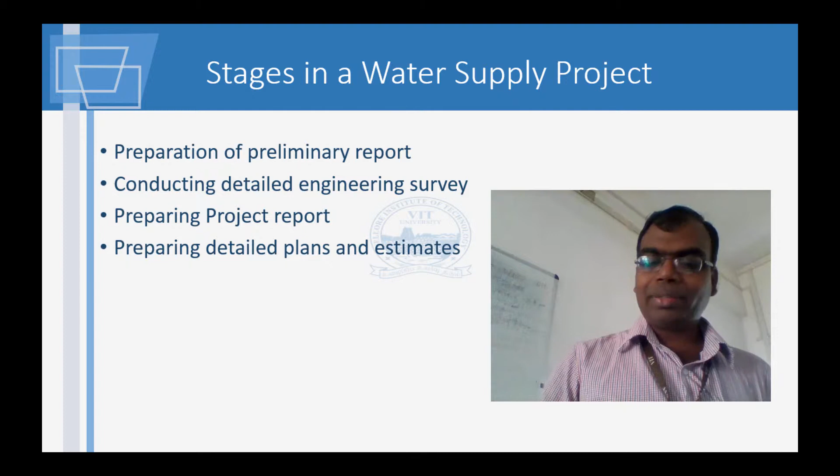Then you have to, of course, prepare the project report. Then there are detailed plans and estimates. Costing is very important, and in most cases there is cost overrun. I don't know in India how many projects have actually stayed within the scheduled budget and made a profit. All these things contribute to cost overrun.

For some reason or other, like for example, water hammer is a classic example. It is there, it's going, it broke.

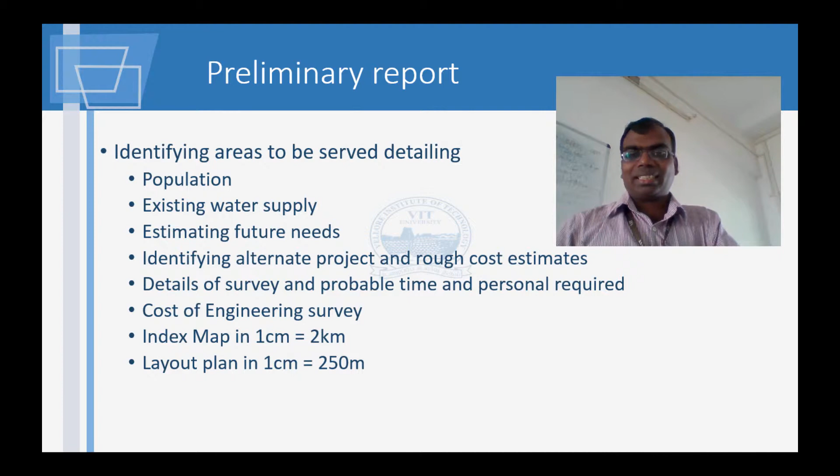Now this preliminary report, these are all points taken from that audit book. I'm not going to read each of these, I'm just putting it on the slideshow. Please go through what the government is actually telling us. So this is something about the engineering survey.

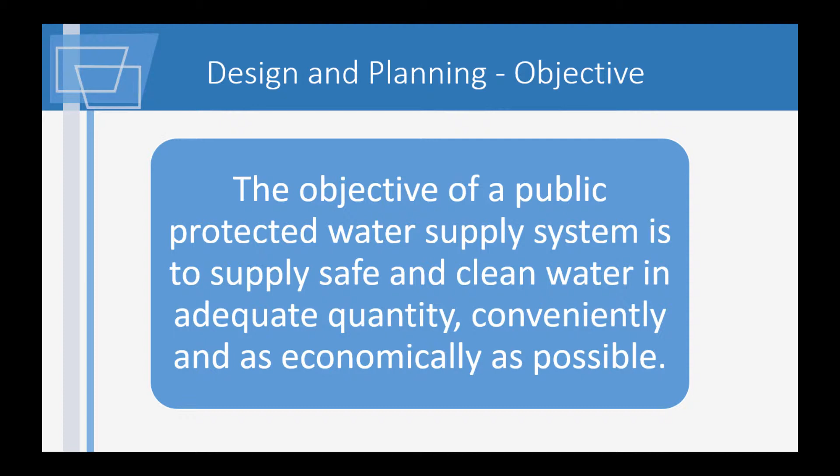So yeah, this is just the dates you need to know. I don't believe in asking people to mug up dates because they can just look it up. So just have an idea of this.

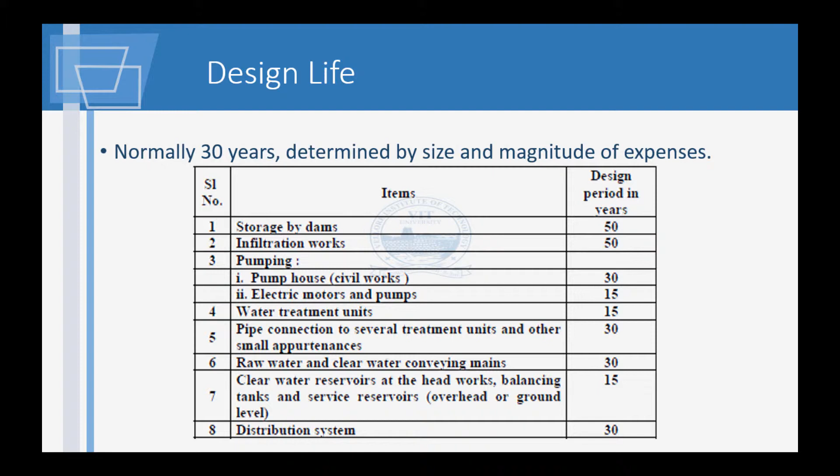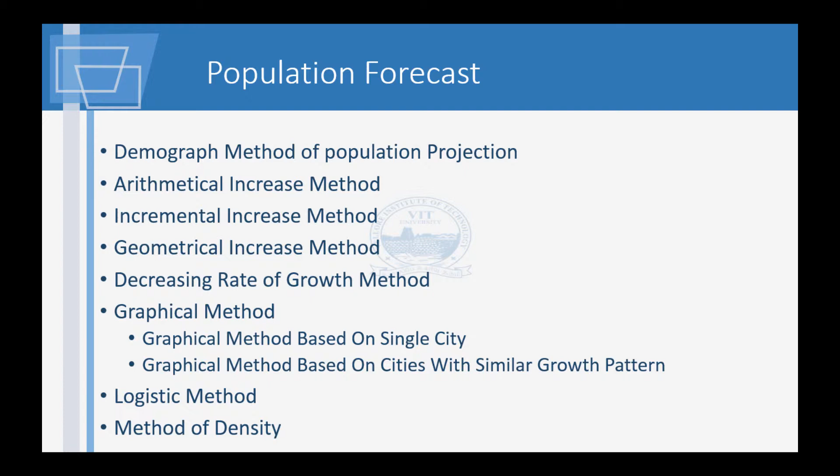Now this is the other important thing I would like you to go through: the population forecast techniques. If you have a look at your book, I don't think it will be there. Please have a look at your book. Is this method of population forecasting available, any of these? If it is available, I will not tell the story. Otherwise, I'll tell the story, and then you have to look at Santosh Kumar Garg. That book I know has it, and also this manual has it because I've taken it from the manual.

I'll suggest you go through the index, the appendix, the subject index. Apparently, it doesn't look like it's there. Okay, let's not worry about it.

I'll just run through this. So the first thing is the demograph method of population projection. What is this demograph method? They know that in this area, the population is not going to increase or decrease too much. Certain areas will be age old; there will be births, there will be deaths, and based on that only the population is going to be there. It's not going to increase too drastically. You can see many of the remote villages, sizes don't change.

For instance, my roots belong to a village called Minyanapuram, deep in the south. Even now, almost the houses are just the same, same thatch house. In fact, my grandma who just passed away, we go and visit her house, and it's almost the same, that's what my father says. I usually go every 5 or 10 years, and when I go there, there's not much change. Roads are still the same, everything looks the same, no change. So for that village, for almost 100 years plus, the change has not been there. So are you going to expect a sudden rapid change or development? Probably not. So this method will be applicable for such a case.

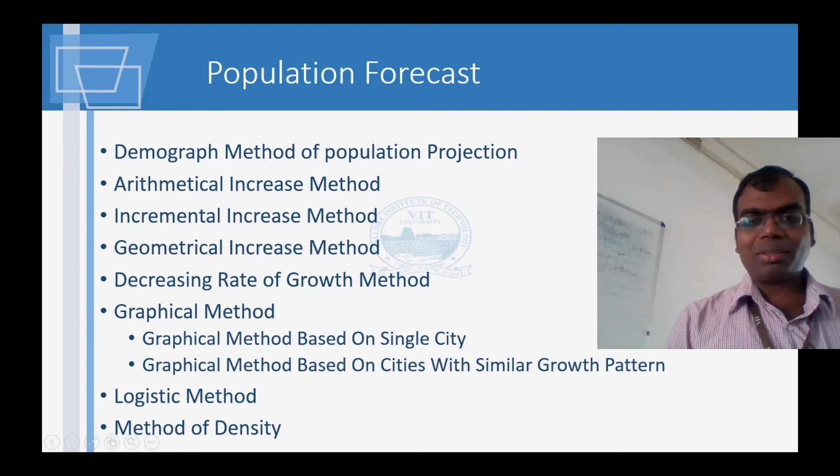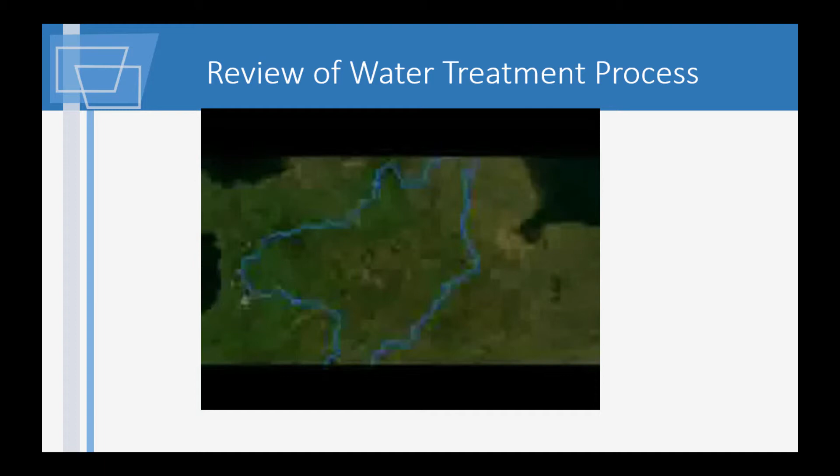I have another short video I'm going to show. This is another interesting video. I'm just putting it for review. You can try to mentally visualize the differences and similarities between the two systems. Again, it's going to be the same thing: some filtration process, some flocculation process. This is a very basic overview of the water treatment process.

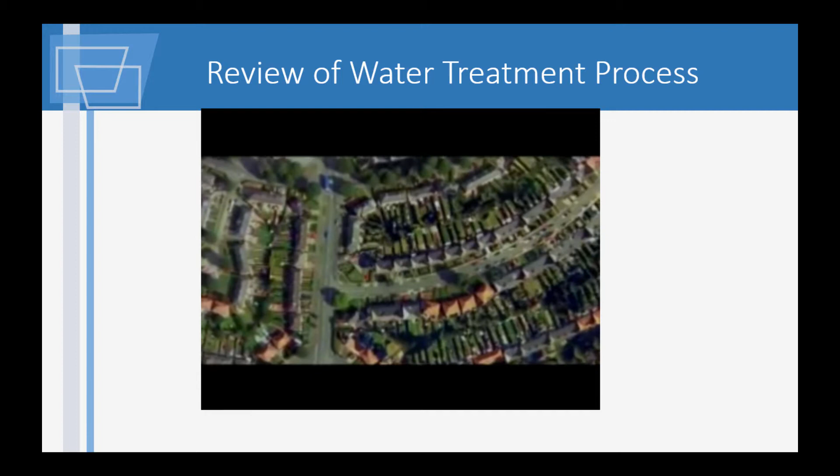Customers always need water, but rainfall is seasonal and increasingly unpredictable. So we often use storage reservoirs to make sure there's always a supply for treatment.

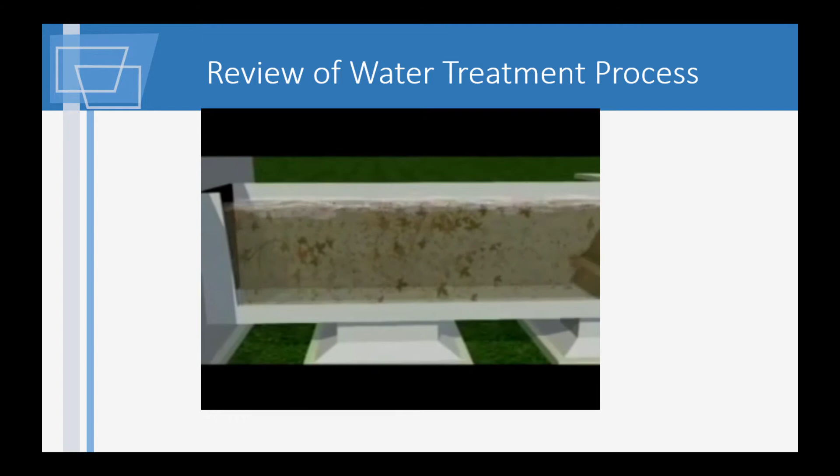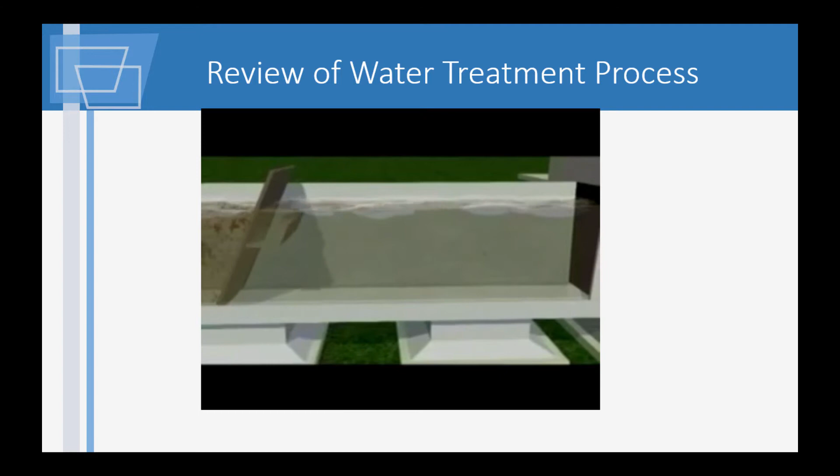By passing water through mesh screens, we remove sticks, water weeds and other large foreign objects. The air takes some odours and gas from the water and allows some dissolved metal salts to separate to be filtered out. We add air by cascading the water down a tower, spraying it into the air, or bubbling air through it. At this stage, there are still some fine pieces of matter suspended in the water, along with colour and bacteria.

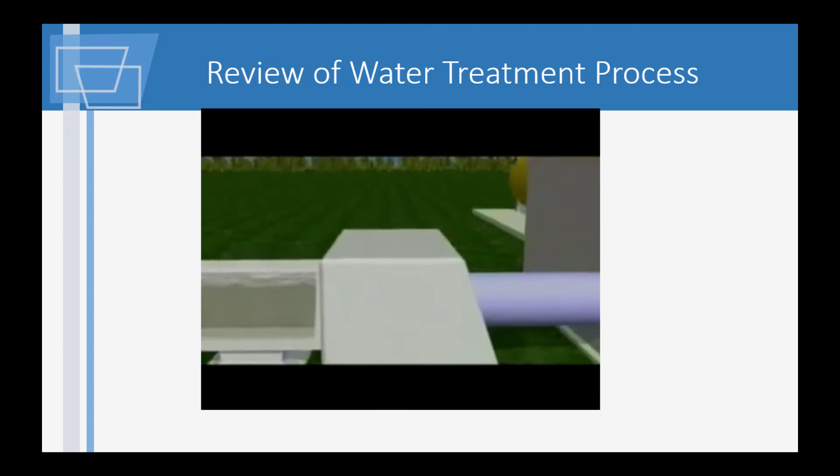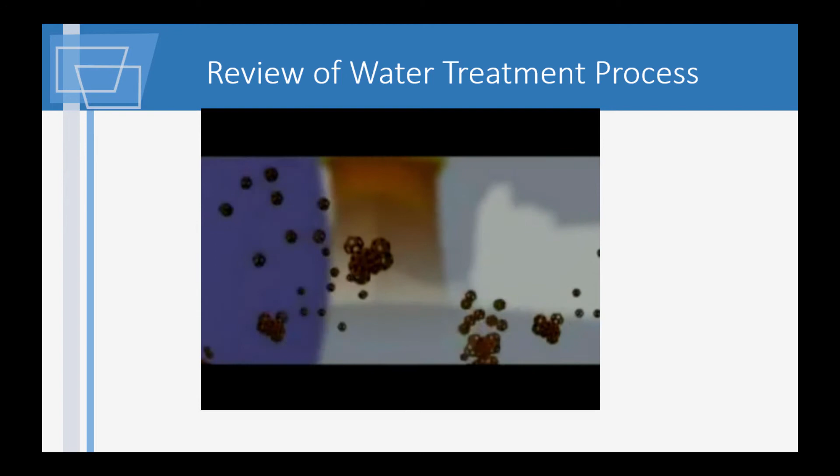We add a precisely controlled amount of a coagulant like ferric or aluminium sulfate. This reacts with the material in water, making it all stick together to form what's known as floc. To make this flocculation happen, water and the coagulant have to be mixed together very quickly and thoroughly in a special device called a flash mixer.

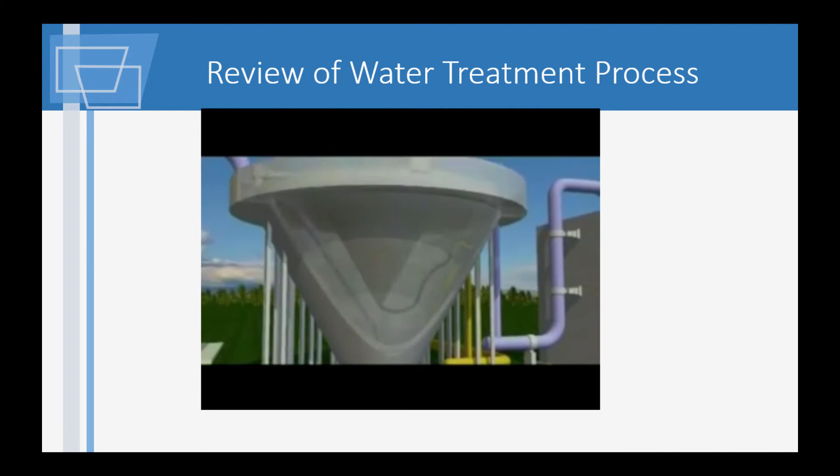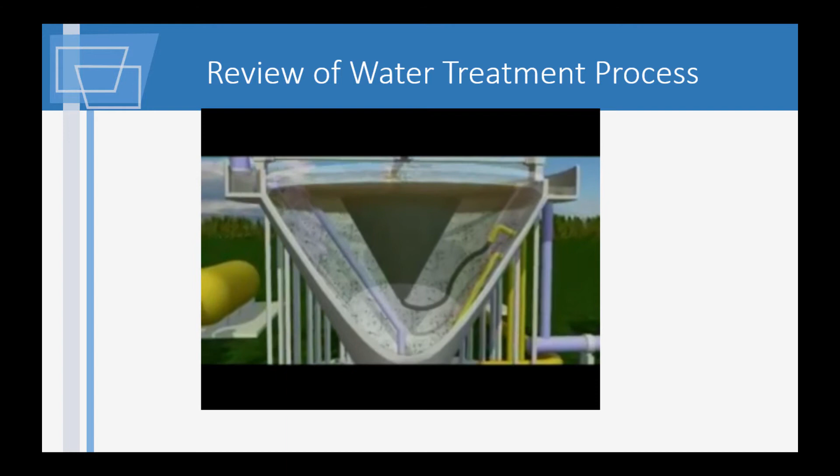Next comes the clarification process. The floc forms itself into sludge and is separated in a specially designed tank called a clarifier. This sludge layer is called the sludge blanket. To control the blanket, sludge is periodically drained off, concentrated and removed for safe disposal.

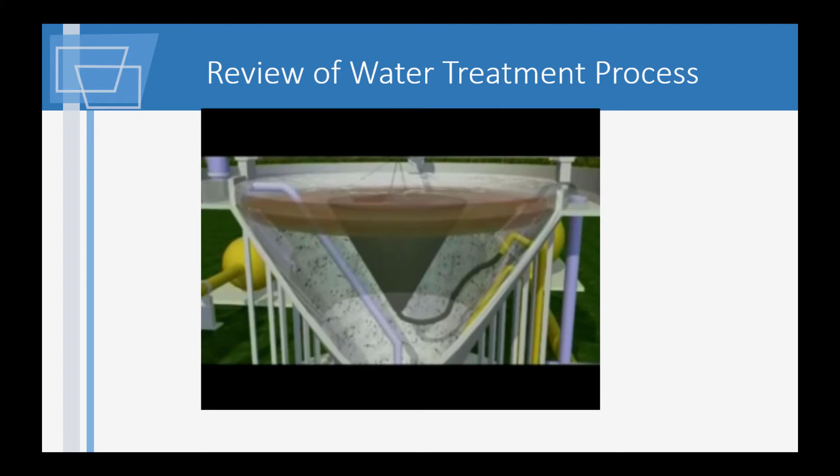Particles filtered out on the RGF, the rapid gravity filter, are removed by backwashing. The water now needs filtration to get rid of any remaining particles. Water is filtered slowly through very fine sand or sand-like material.

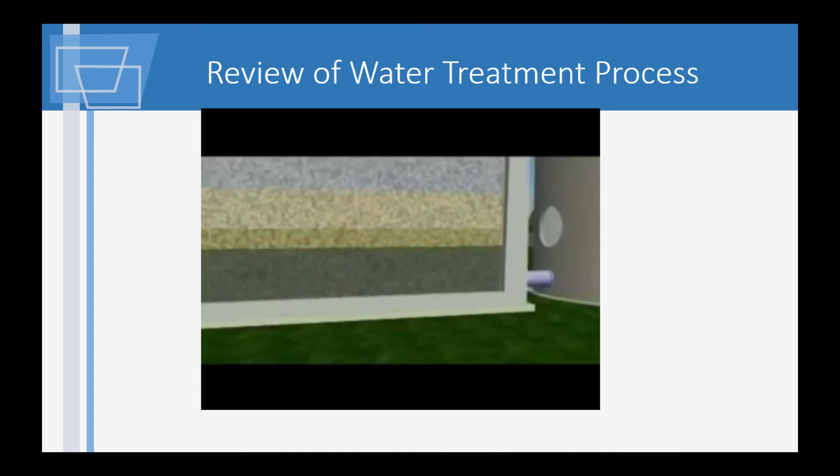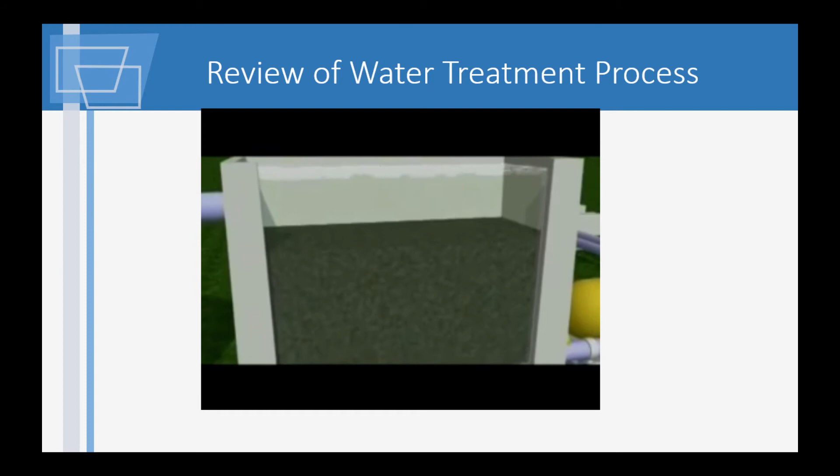For some river waters, we use ozone gas injection as a treatment stage. This can work in conjunction with GAC, or granular activated carbon treatment, where the water is filtered through carbon granules to take out any undesirable traces of largely natural organic materials. The carbon in these filters is removed and regenerated by heat so it can be used again.

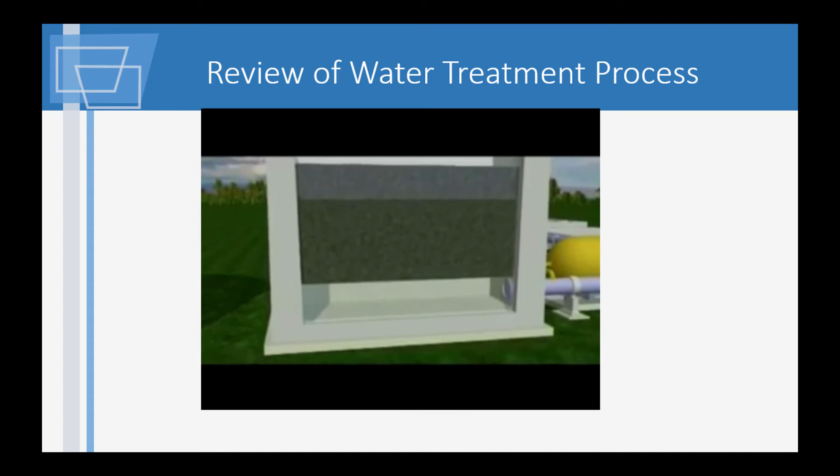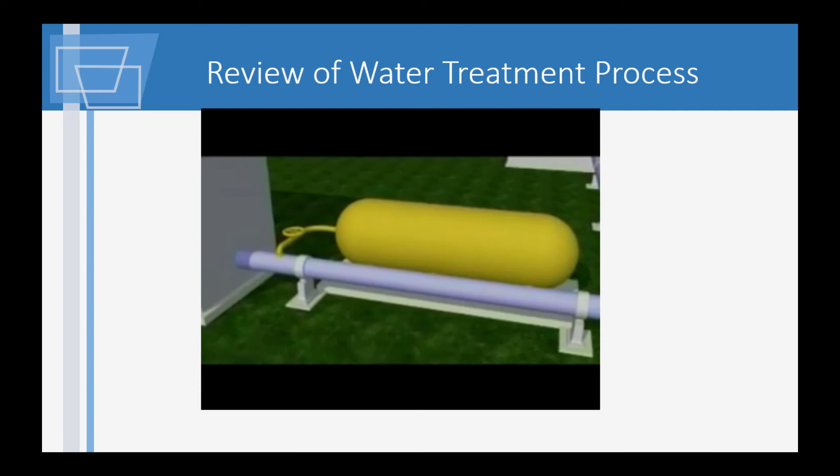Now the water's filtered and thoroughly cleaned, it's disinfected to make sure no harmful bacteria remain. A small, controlled amount of chlorine is the most effective method and provides essential customer protection. This method is used across most of the world. The chlorine has to stay in contact with the water for a period of time for effective disinfection.

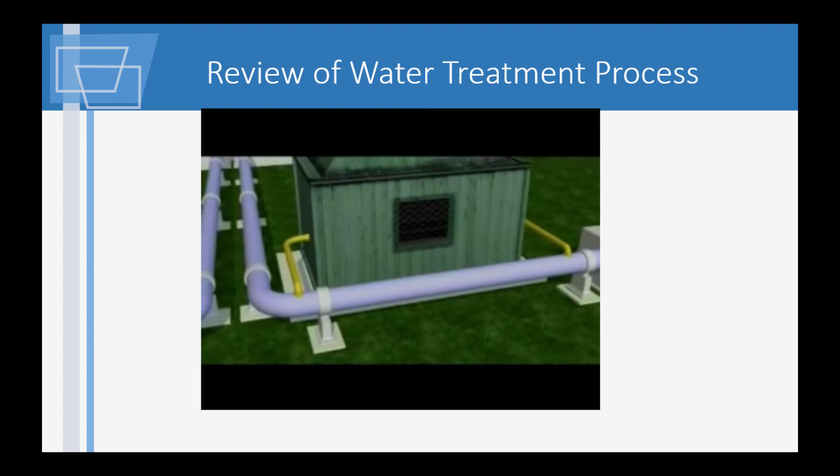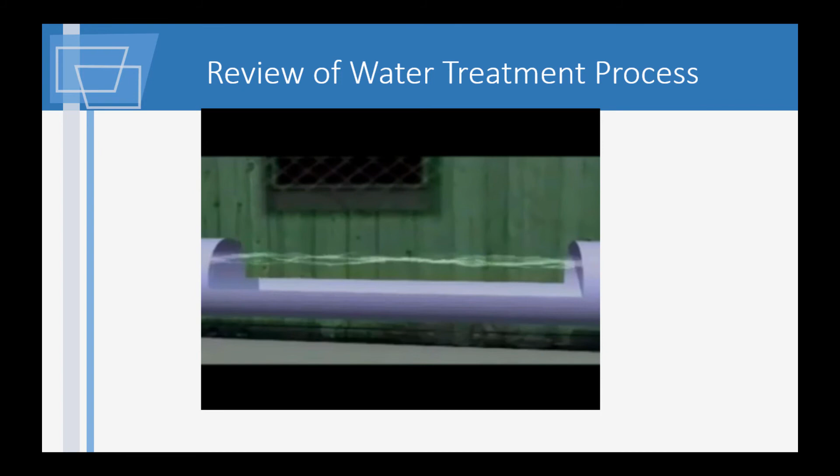Last but not least, adjustments are made to the pH levels of the water during the treatment process so that it's neither too acid nor alkaline. This helps pipework, fittings and the water itself. From the treatment works, water is fed into a huge mains pipe network, nearly 43,000 kilometres long, which forms a grid around the region. This grid is then accessed directly to your home, and when you turn your tap on, it's available to you: clean, safe drinking water.

So, what is the difference in this process with the earlier one? Filtration was more refined, and for disinfection, they only use chlorine, not ozone. They bubbled air here, but anyway, ozone, you're right. And then they didn't go for the thickener, the clarifier, in the previous one. About the clarifier, I also got another very good video on YouTube, but I'll be using that for my sewage treatment because I feel it's more appropriate for that part.